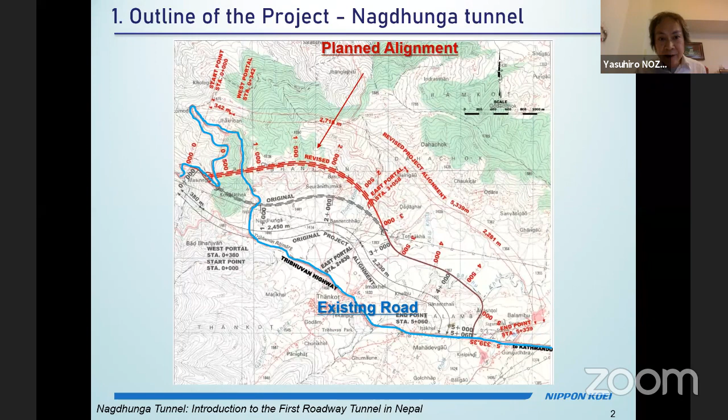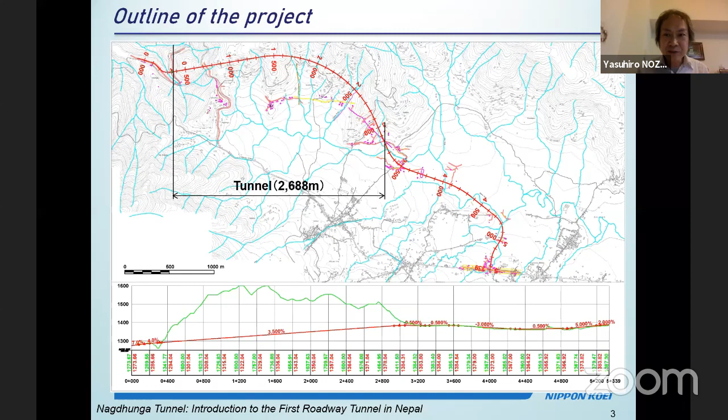Before, Ms. Kalpana explained the outline of the project, so I will skip that, but our planned tunnel is about 2.69 kilometers in length. It's the first road tunnel in Nepal. This is a typical cross section, meaning about 3.5 meters, one lane in both directions, plus shoulder and center line or something like that. So in total, the tunnel is about 11 meters wide.

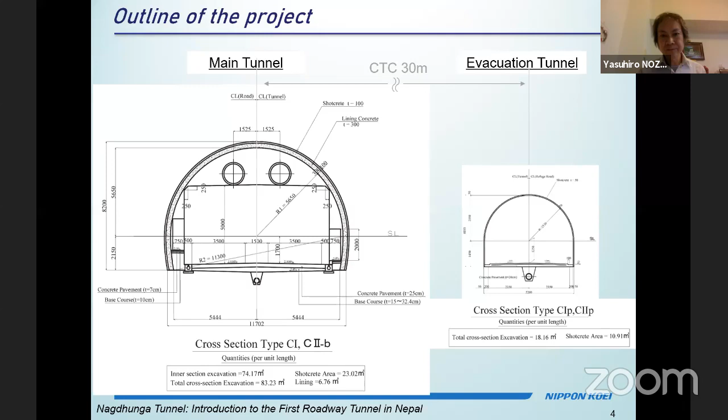So from now, I would like to enter into some more specific issues regarding the tunnel construction project. Actually, for realizing the project, we need to study carefully, know well the condition, and solve the technical issues, if any.

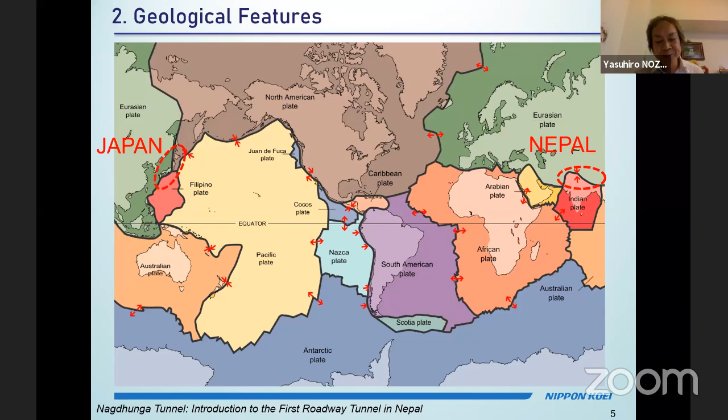Firstly, geological features. This map shows the tectonic plates on the Earth, so you can easily find our countries. Nepal and Japan are on the border of the plates, a very similar condition. This collision activity of the plates formed our ground, and the activity strongly affects the geology of our countries.

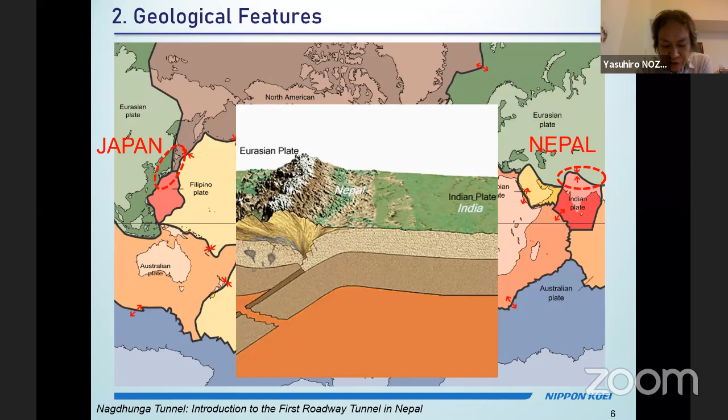This is the Nepal and Japan geological map. As the activity of the tectonic plates formed our ground, we can find similar geological conditions in both countries: geological complexity, lineaments, faults, periodic fatal earthquakes, and so on. Our geological condition is very different from other countries with stable geological conditions, for example European countries, African countries, and Central American countries. China is also very stable. Those countries are at the center of the plates.

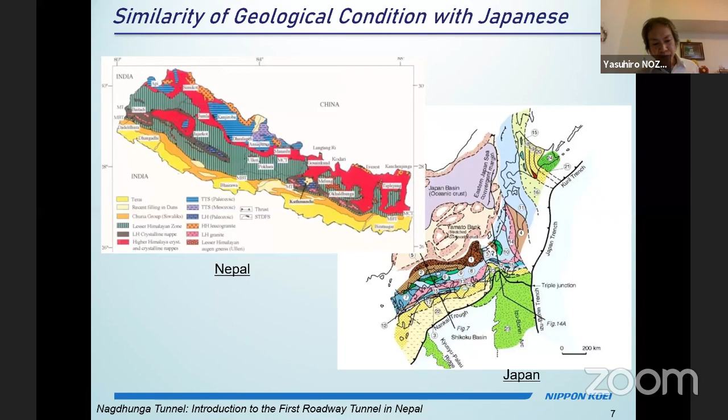So we think many Japanese experiences of tunnel construction projects can contribute to development of Nepal's construction technology. For planning this project, we apply Japanese design standards. These three standards are among the major standards in Japan.

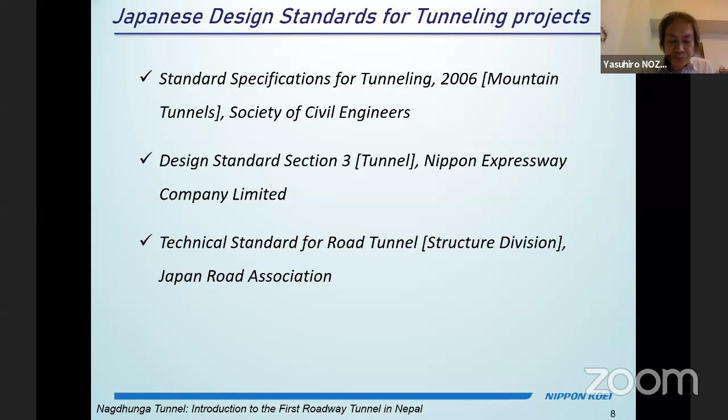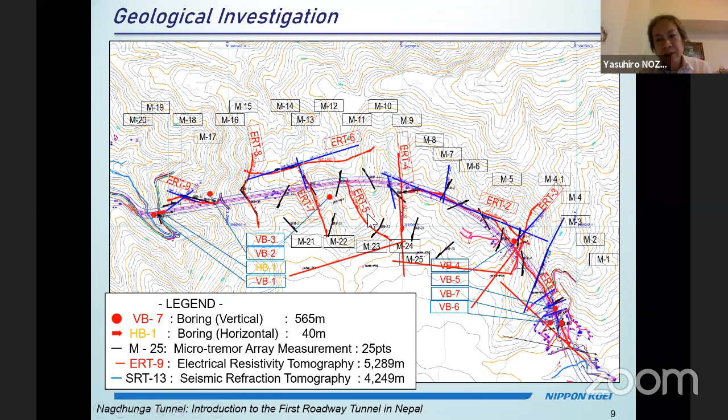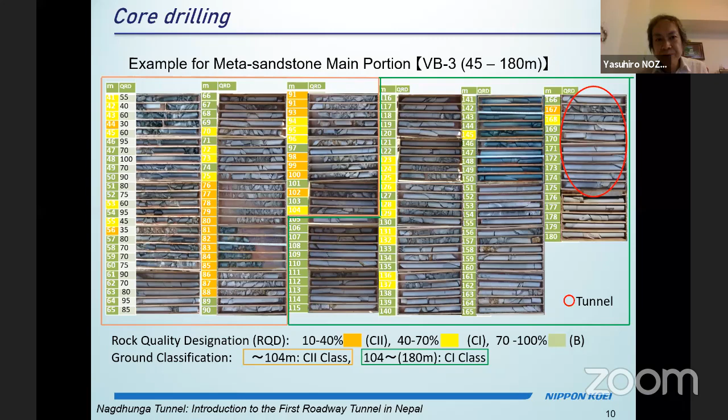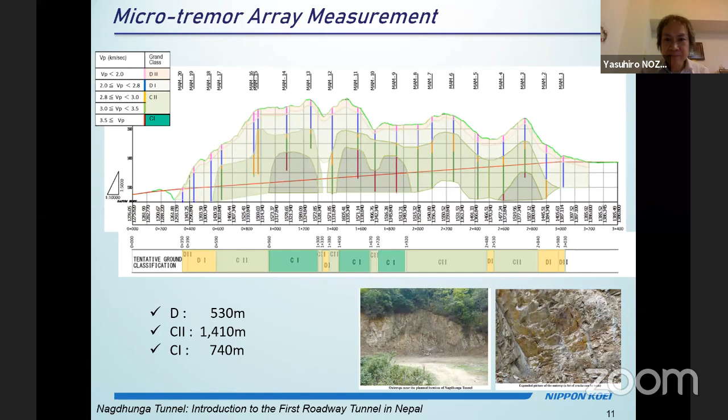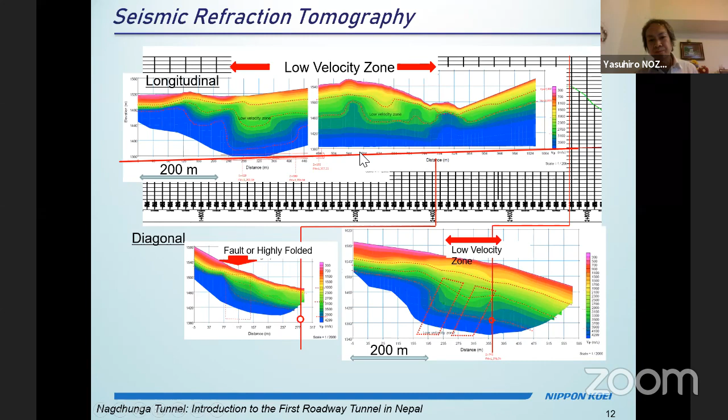According to these investigation results, we identified the formations and structure of the target area geology, including faults, unconformity, and fracture, meaning a weak geological structure on the tunnel alignment from an engineering point of view.

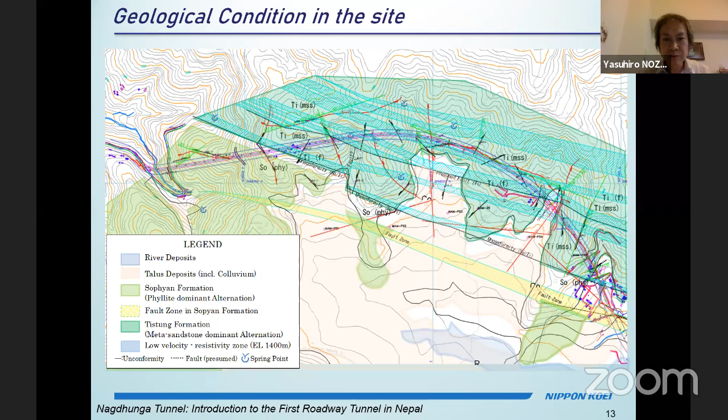We summarized the results like this. Here is the tunnel alignment, and this green area is the weak zone. Along the tunnel alignment we carefully determined the hardness of the geological condition. In this legend, on the left side, you can see C1, C2, D1, D2, divided by the wave velocity. C1 is harder than C2, D1, or D2. D2 is the weakest in this area.

For constructing safely, for excavating this tunnel safely, we need to take the most care when passing that area. In this drawing, the D1 or D2 sections need more careful attention.

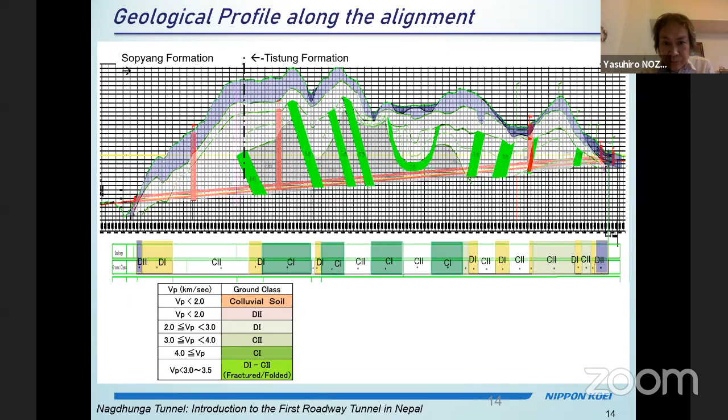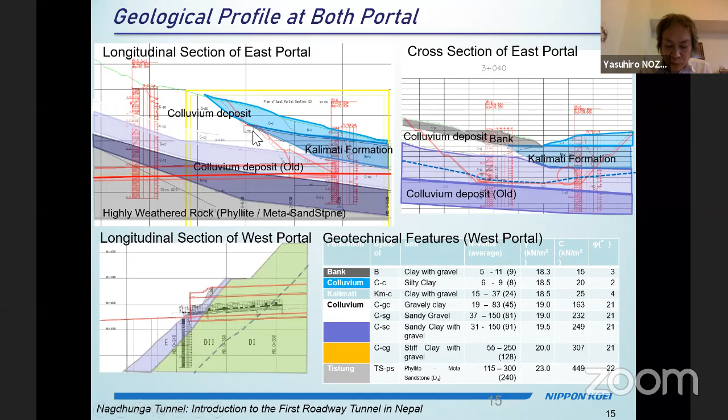Next, the construction method. For the tunnel construction we applied NATM, the New Austrian Tunneling Method, with auxiliary support and full-face excavation. NATM is one of the tunnel excavation methods. The phenomenon is a little unique compared to other civil works, expecting ground arching action as the main support for tunnel stability.

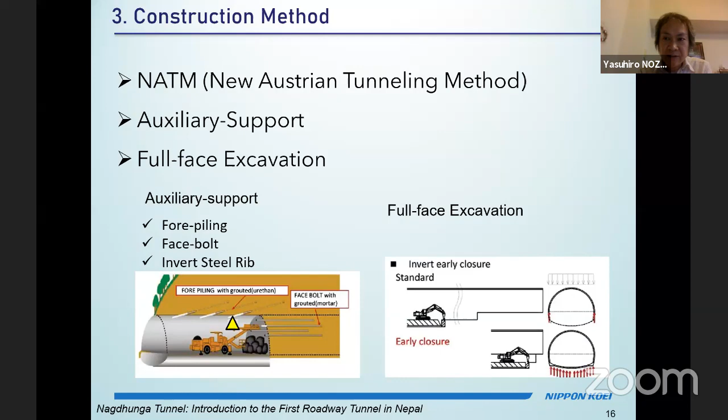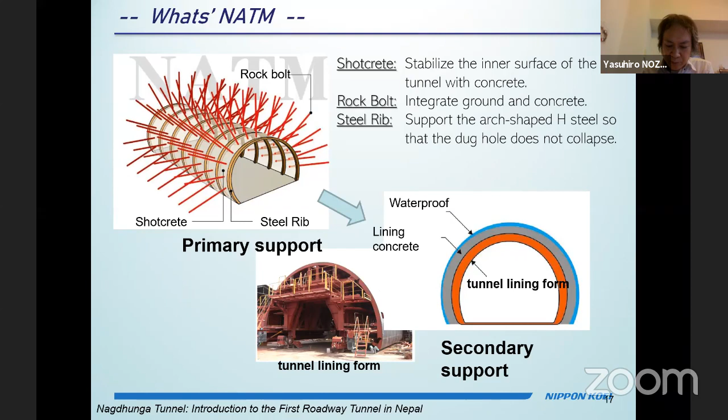So this is what NATM is. NATM basically consists of shotcrete, rock bolts, and steel ribs. The detailed specification, such as the number, area, and spacing of rock bolts and steel ribs, is determined by adjusting to the geological condition. Some sections are very hard and some are a bit weak along the tunnel alignment, so we need to adjust the support type specification to the actual geological condition. This is one of the important points of NATM construction.

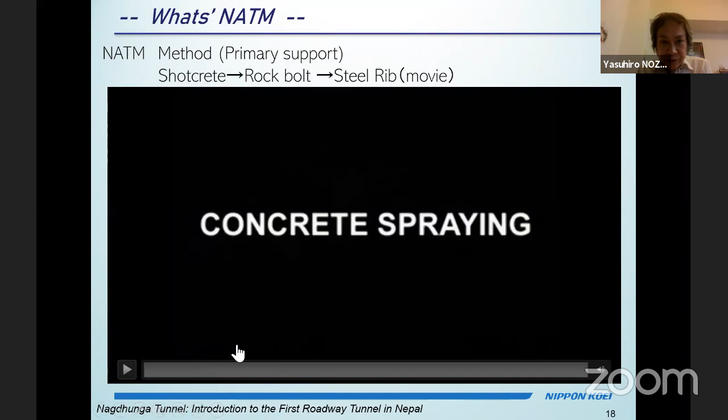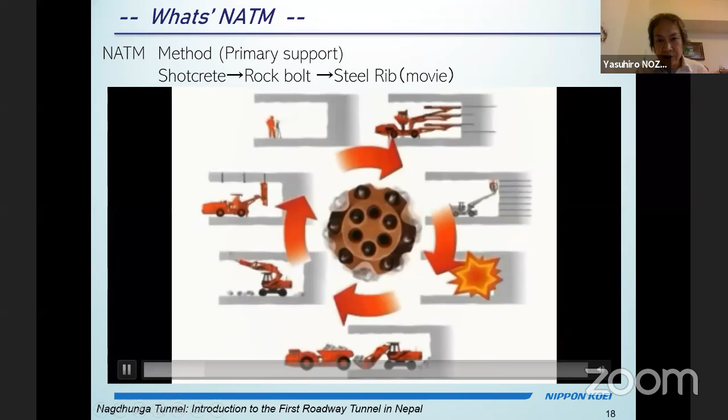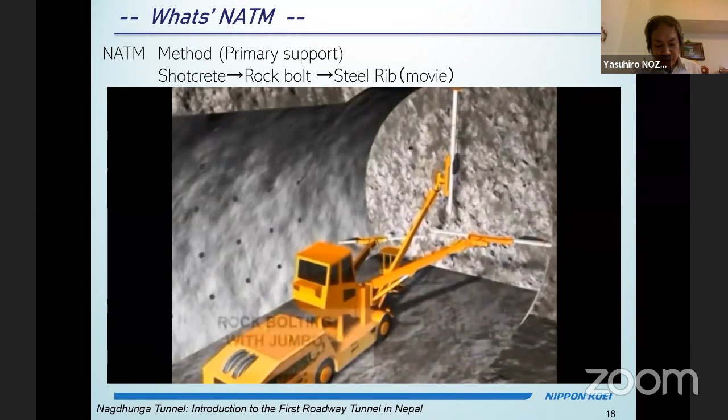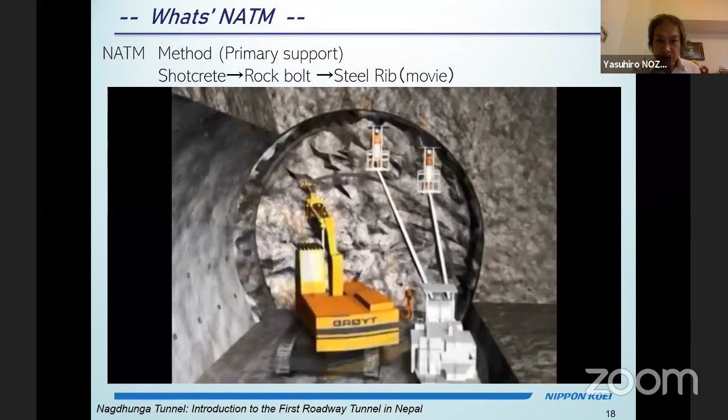Please see the videos showing the sequence of this method. First shotcrete concrete is applied, then rock bolts are installed here. After that installation, steel ribs are placed like this, and then lining concrete is poured like this.

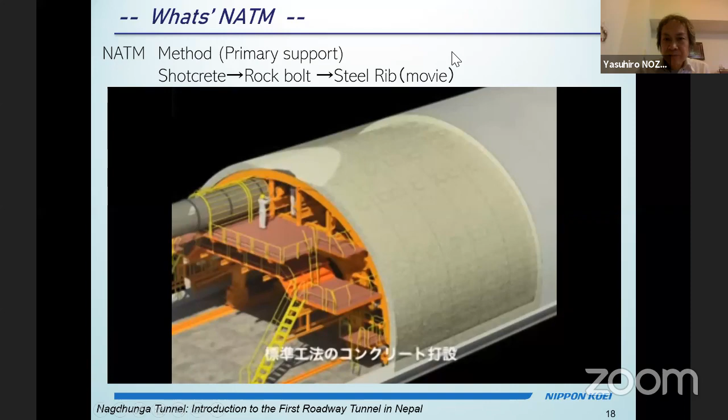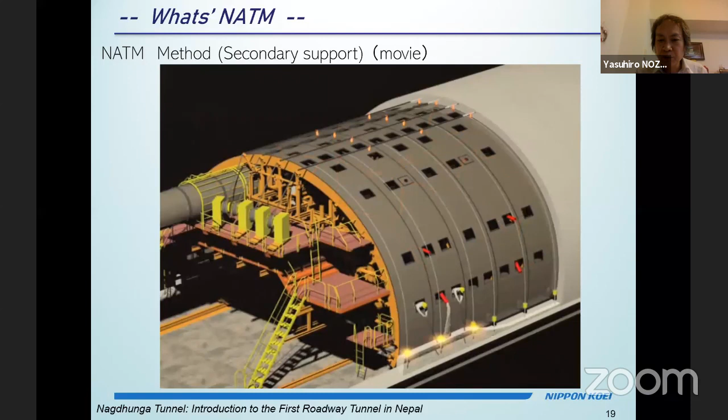This circular form is the form for pouring concrete. So for pouring, please see this. From the window, the equipment is placed like this. This is the actual vibrator for concrete compaction. This is the pouring concrete pipe for pouring concrete, and during pouring, the vibrator will be pulled by the workers like this.

Manual, but it's very important. You can understand the tunneling construction is like this: lining concrete covers the original geological ground, so that we avoid cavity, and the lining concrete layer is significant for ensuring stability and durability after completion of the tunnel. That's why careful compaction is very important for keeping the quality.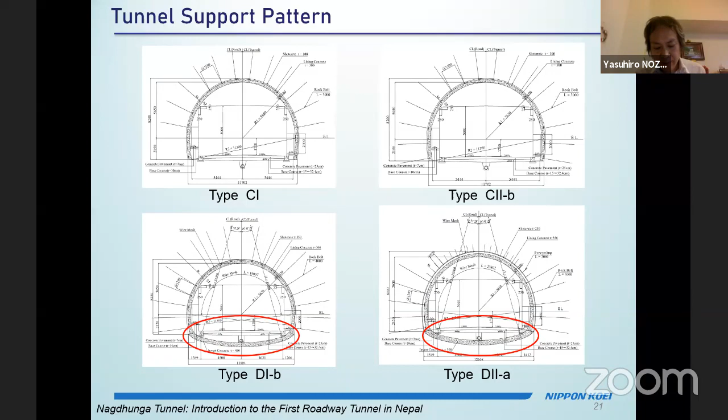So our next topic is the challenging issue at West Portal. West Portal is planned just under the existing Tribhuvan highway. From the surface of the road to the top of the tunnel is only 6 meters. During construction, the road is in service, thus ensuring safety and keeping stability is the most important issue in the project.

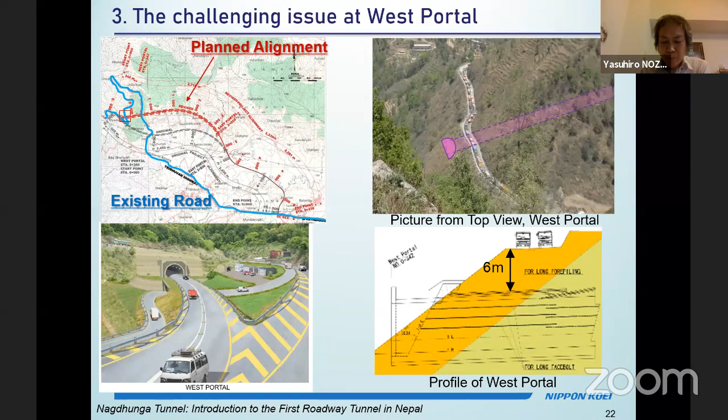To keep the stability, we planned an auxiliary method, and we conducted 3D FDM, meaning finite difference method, for figuring out the behavior of the current slope, including existing road. This is the model of numerical analysis, and the cases for alternative study with changing the excavation patterns.

The first one is a long bench cut, from top to bottom. Case one is a bench cut method: from the top of the tunnel, firstly about half the advanced excavation will be done, and then the lower half will be excavated.

Case two is full face excavation: one time, almost all from the top of the tunnel to the bottom of the tunnel will be excavated at once. Early closure of the tunnel invert, the bottom slab concrete, can be done for this one-time excavation. So that's case one and case two.

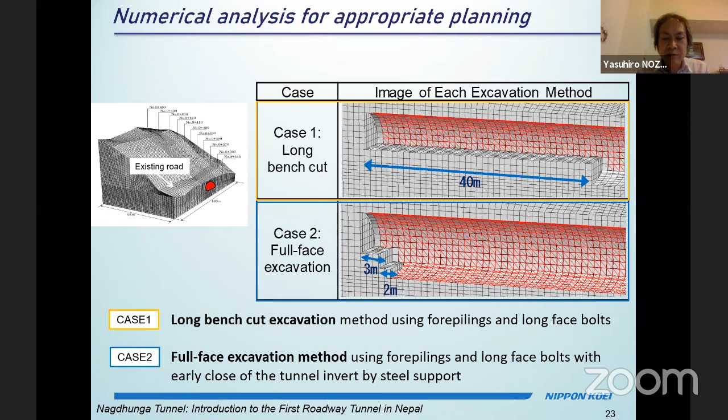This is the prediction of settlement on the ground after excavation. From comparing this to the allowable settlement, we selected the appropriate construction method. The left side drawing shows settlement: about minus 10 millimeter settlement subsidence will occur around this blue area.

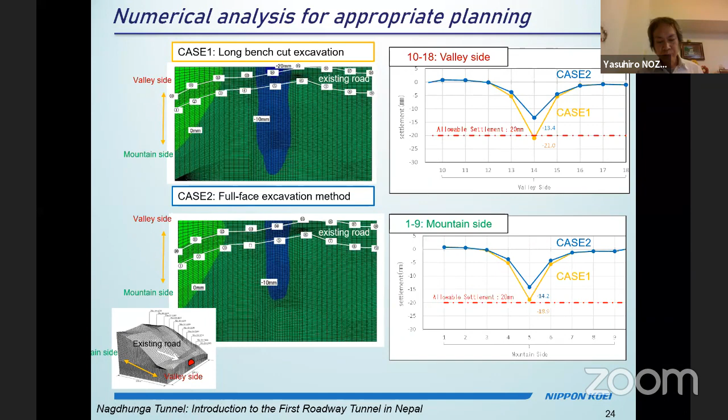So case one is like this, case two is like this. Comparing these numerical analysis results, we selected the method: full face excavation and early closure of the invert by invert concrete. With this early closure type of construction, we also applied fore piling with grouting near the portal area like this, and also face bolts for improving the strength of the ground.

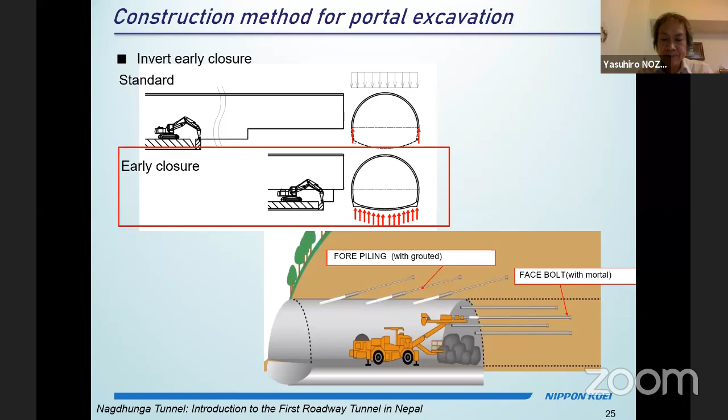This is a typical cross section near the portal section. You can see many rock bolts and, around the crown, the top of the tunnel, many fore piling using grouting pipe and grouting method. So you can see a more robust structure than the type used in the middle section.

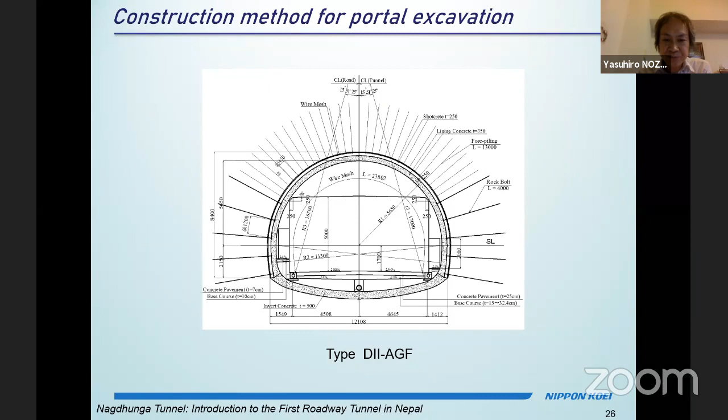Today's summary: complex geological conditions in Nepal and Japan, we conducted careful investigation for figuring out these conditions. For the construction method, based on the basic idea of NATM, we selected the support type to keep stability while adjusting to the geological condition I explained. Lastly, for west portal construction, we carefully studied and selected the technology for ensuring safety during construction.

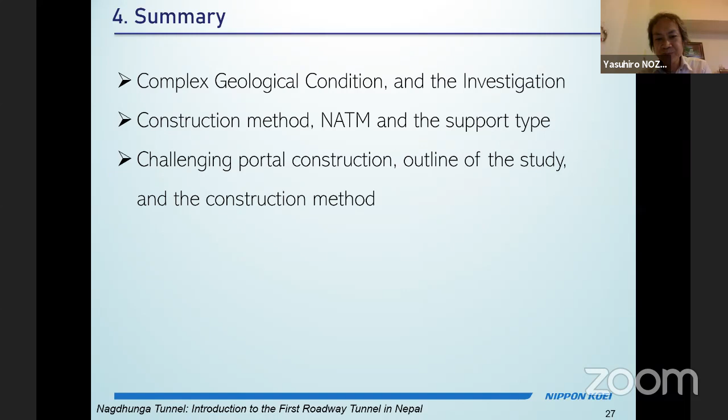In Japan, the COVID situation is a little bit bad, but it's now improving a little in the Tokyo situation. When I get my visa and flight ticket, I will go to the site in Kathmandu for construction supervision and do my best for project success. I'm now looking forward to seeing everyone in Nepal. Again, I appreciate you giving me this opportunity. Dhanyavad.

Thank you very much, and namaste, everybody. It's my great pleasure to listen to the presentation from the previous speakers and comments. So, after looking at the design which is here,

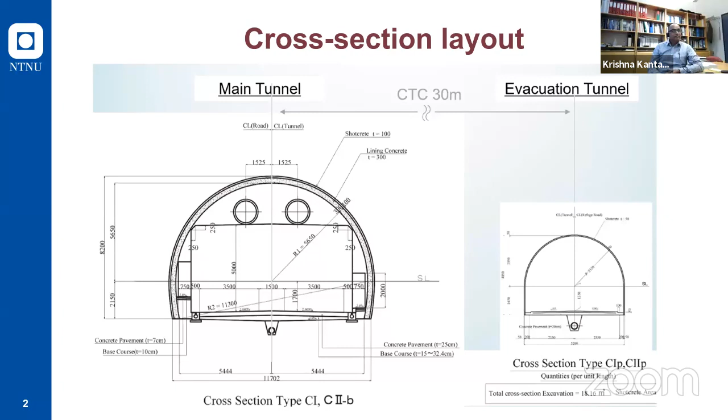the traffic volume is estimated at 10,000 vehicles per day, and with the cross section given here, with this evacuation tunnel, I would have preferred to have a 2 tubes tunnel here because the traffic is too huge, especially when it comes to the safety requirements. Anyhow, we have to make this small tunnel for the bypass, so it would have been extended and made parallel as a 2 tubes tunnel to have better safety conditions, because the cost will be almost similar. So if we had a system like this, 2 tubes tunnel with some connection tunnels in between, it would have been much safer to drive through, because

the tunnels are steeply downhill. So, anyhow we have to have this evacuation tunnel, so it would have been extended to have a parallel tube. In my opinion, it would have increased the safety standard much more than the present instance. Because in a rush hour, there will be over 400-500 vehicles in this tunnel, and if suddenly something goes wrong, there will be a stoppage, suffocation, quite a lot of exhaust, and then people and vehicles have to be evacuated. If it was a 2 tubes tunnel, it would have been much easier to handle.

So it's a very important national project. When we decide to invest and make such improvement to the infrastructure, we should look at the long term. This is the major concern I have. The road department should have looked a little bit more critically and looked to the future, because this is the most important highway to Nepal, which brings people, materials, equipment, everything through to the Kathmandu Valley. So if there is an accident inside the tunnel, it will take very long to evacuate people and vehicles. Even though there is a small margin to bypass traffic, the pollution extent will still be quite considerable because of this. So there will be a stoppage of vehicle movement that will make a huge impact.

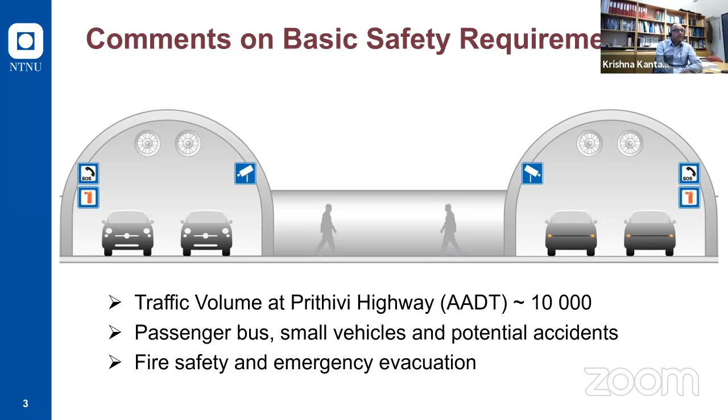And then there are some alternative things. Regarding the geology, I think in this area the rock is mainly meta-sandstone and phyllite, which is a fairly good rock and also a hard rock. Most of the phyllites have compressive strength over 30 megapascals, which is better than concrete. So the support system would have been different too. It depends on the culture and the way we build the tunnels, you know, where you are and what kind of methods we use.

And also in this geological figure, I see 3 vertical fracture zones, but most likely they are not vertical. They should follow the foliation plane of the phyllite or meta-sandstone, in my opinion. Of course, there have been many investigations, and because of that it would have been decided, but still, I do not believe that.

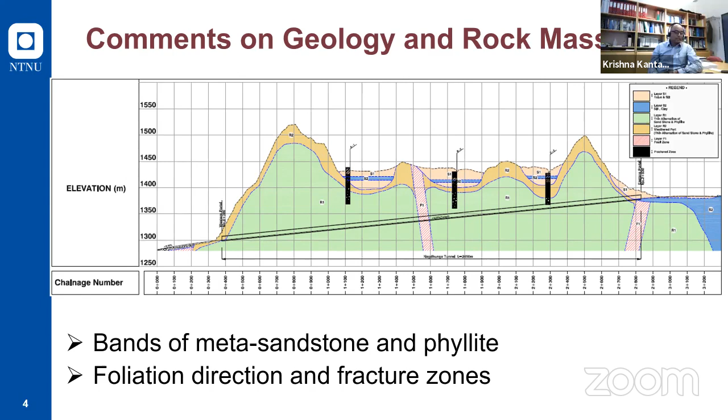If we have to repair this, this tunnel will be used for 100 years at least. The concrete starts decaying after 40 years, so this solution will not give any possibilities to repair. Then the tunnel size will be reduced if we have another layer of concrete.

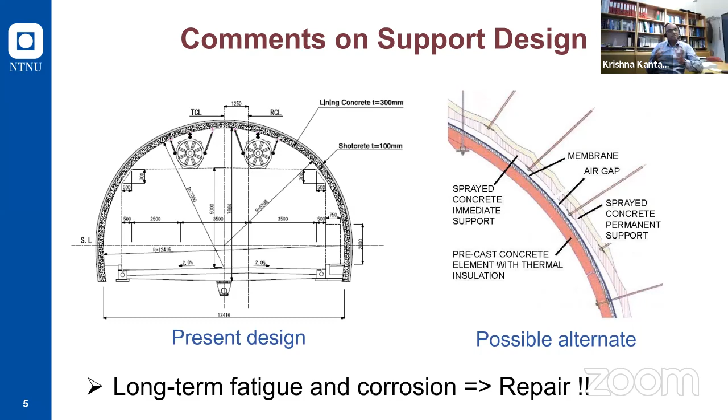So these panels can be removed, and new panels can be installed again after 40-50 years. So then this tunnel would have served the society for a very long period. And still, when we took off this panel, it is possible to add an extra layer, 5-10 centimeters, of extra shotcrete. So that would have increased the life of this tunnel, in my opinion.

So this is an example of how we can make such possibilities. For example, we have this sprayed concrete or shotcrete with systematic bolting to the right side. While excavating the tunnel, this support has to be placed anyhow, so that can be used as a permanent support for the tunnel. And then as a safety requirement and other requirements to fulfill, we could have used these concrete panels, and by doing that, it is much faster and easier, and it is possible to replace. There are many benefits of this solution.

So this is what I would have thought if I was asked earlier. This is what I wanted to comment. Thank you very much.

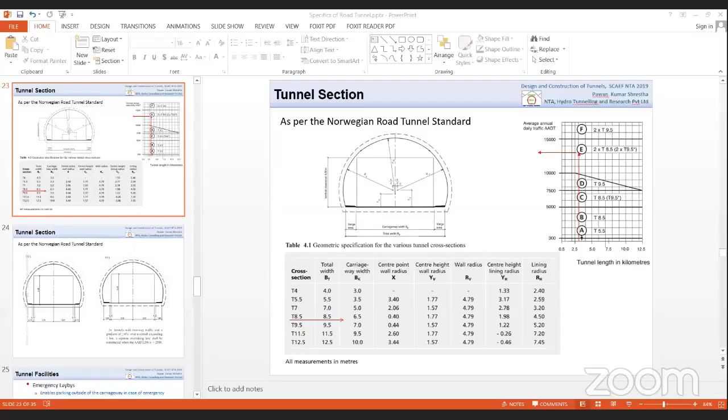So if you see here, this is from the Norwegian road standard, right? To my knowledge, earlier we thought that the Nagdhunga road tunnel would have hardly 10,000 AADT, but as Miss Kalpanaji is showing, it's 13,000, and our tunnel falls in this range. That means we have to have about two tunnels of 8.5 meter diameter.

This is according to the Norwegian road standard. Had it been less than 10,000, we would have hardly needed one tunnel of 9.5 meter diameter, plus some evacuation provision. But the number of traffic would rather increase than decrease. So I believe for our case, the range should be somewhere around 8.5 or 9.5 meters, with two tunnels of these diameters.

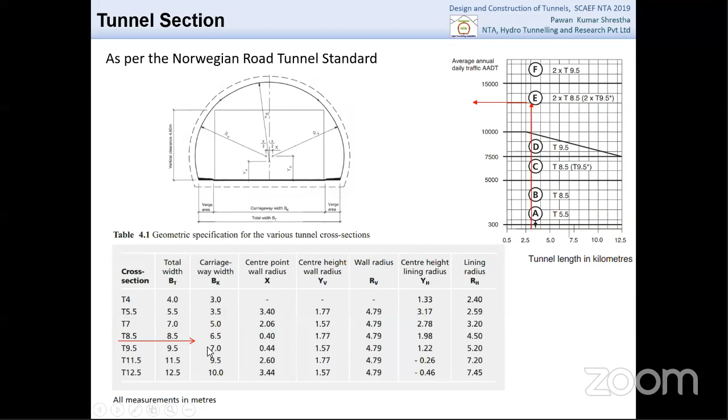We should have chosen either this or that, preferably 9.5 meters for the future, but this 8.5 for now, at least up to year 2030. We should have had two tunnels, but bidirectional, unidirectional, two tunnels, so one for going down and one for going up. But as you might have thought, there is this additional existing road that can be used to reduce the number of traffic, so people going down from Kathmandu to Naubise can still use the existing road, reducing the number of vehicles. But it is up to the DOR or designers to know the basis for choosing the number of tunnels for this Nagdhunga road tunnel.

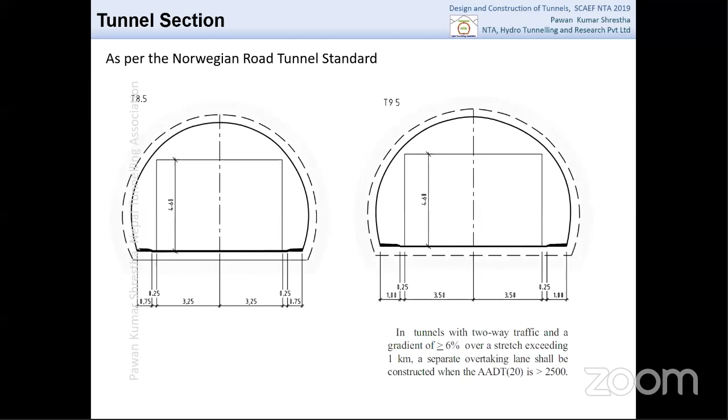A little comment, since we have already decided to build this tunnel and we have this evacuation tunnel, the evacuation tunnel could have been expanded to a new tube. It doesn't cost much more. For the evacuation tunnel you have to do all the support, concrete lining and everything, so it will cost quite a lot of money anyway. The government should have discussed this, and instead of having just an evacuation tunnel, made it a new tube tunnel, so life would be much easier for Kathmandu for many years to come. I still think the road department should think about it.

Thank you, Professor. That was discussed at length during investigation and design. There was a feasibility study, and then a detailed design. At that time these things were discussed many times, and it was the decision made earlier. So I'm not sure whether this can be taken up by DOR within this project or not. I think that will get answered by the Deputy Director General from the DOR, who is present here.

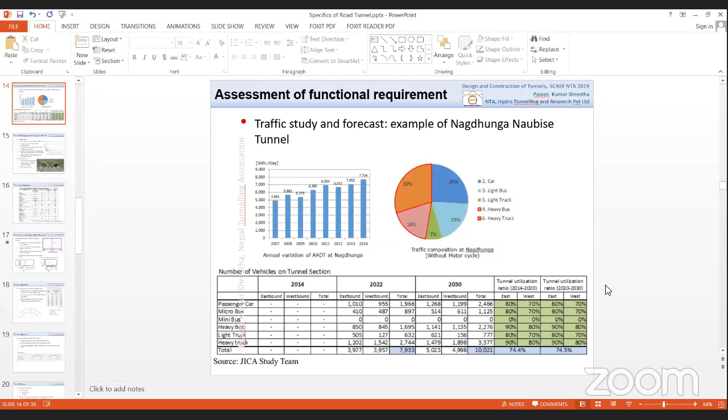I'll give you an example. We have 4 tunnels from here to the airport in Trondheim. These were single tube tunnels built in the 1990s. At that time the government decided to reduce expenses and have just one single tube. But now traffic has increased so much after 15-20 years, so now they have to build new parallel tubes, which will cost 3 times more than it would have in the 1990s.

So therefore, since we have to have this evacuation tunnel, I think the best option is to expand it, and if there is no loan coming from Japan, the government should invest internally. This is a very important road. It won't cost much, and we will save quite a lot of money.

For your suggestion, I think DOR will take note of it, and they will decide on the strategy, what they have to do. Well, I should close now because of time.

One thing I just want to put - we have the fast track coming very soon, and that will have twin tube tunnels, 4-lane all through from Tarai to Kathmandu. That will take central and eastern part traffic almost totally, so we'll be left with western traffic only. So this even 10,000 may not be the case in actual traffic volume. With that note, I think our time has gone.